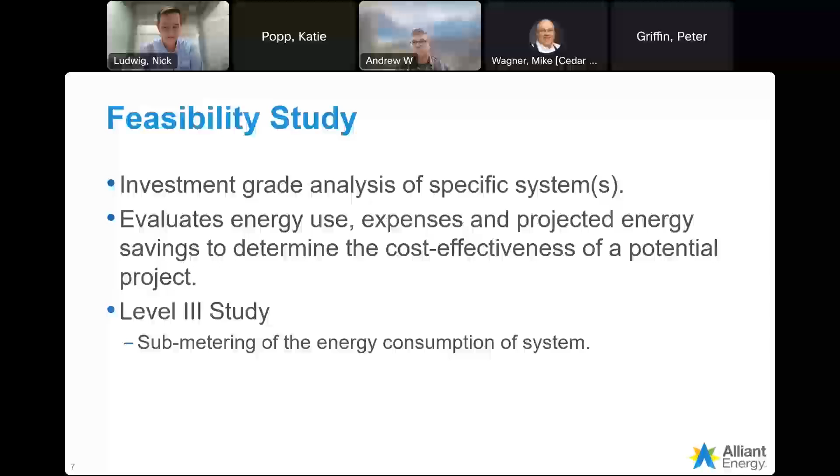So thinking about the process, the first step is to reach out to your key account manager to seek approval. It's very simple - we'll just have a few questions to look at the type of equipment that you're looking at, look at a proposal from the contractor, consultant, or engineer that you're working with. And then, based on that review, you'll have the green light to have your consultant conduct the study.

And here's where the incentives come in. As we're aiming to make this as easy as possible, Alliant Energy's incentive program will cover 50% of the study cost, up to $7,500, upon pre-approval of the study once the study is complete. Then, based on the findings of the report, if you implement 75% or more of the recommendations within 18 months, Alliant Energy will cover the remaining 50% of the study cost, up to $7,500.

And I want to point out, there certainly may be room for additional rebates based on the actual work that's done through a custom rebate. Here we're just discussing the study cost, so you're looking at a total of up to $15,000 to pay for the feasibility study. That hopefully then leads to upgrades, investment in your equipment, which could include custom rebate.

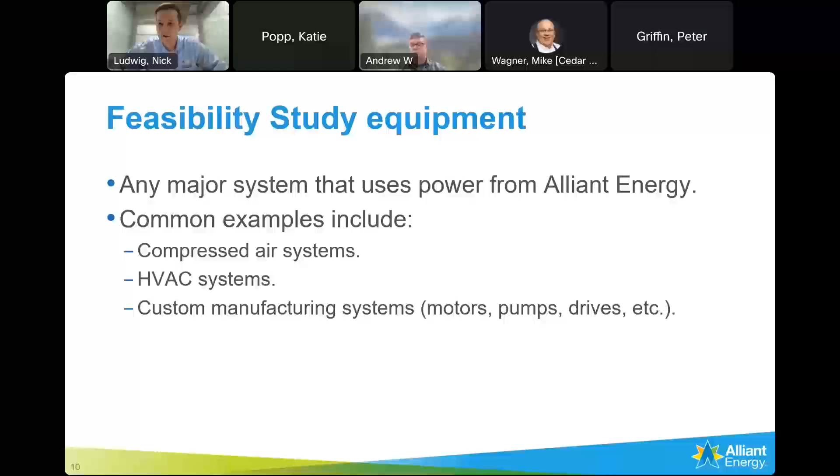As I mentioned, this could be done by the contractor, consultant, or engineer of your choice. We do have general guidelines to help those folks as they do this type of analysis. I'm not going to read through this information, but I just want you to know that we have this available. It could be that we work with the contractor or engineer to help make sure they include the information they need as they work with you to conduct this feasibility study.

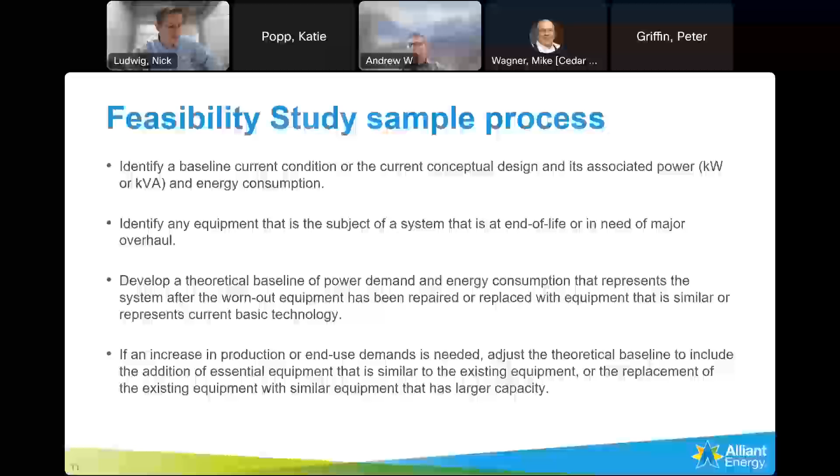But I'll emphasize here at the end in bold, of course, most of our customers are generally interested in the payback associated with whatever type of investment they need to make. If you can calculate the amount of money you're going to be putting into this type of investment, the energy savings associated with that, how many years is this going to take to pay itself off - hopefully then that ties into your sustainability goals and can be a better use of your energy, and everybody wins.

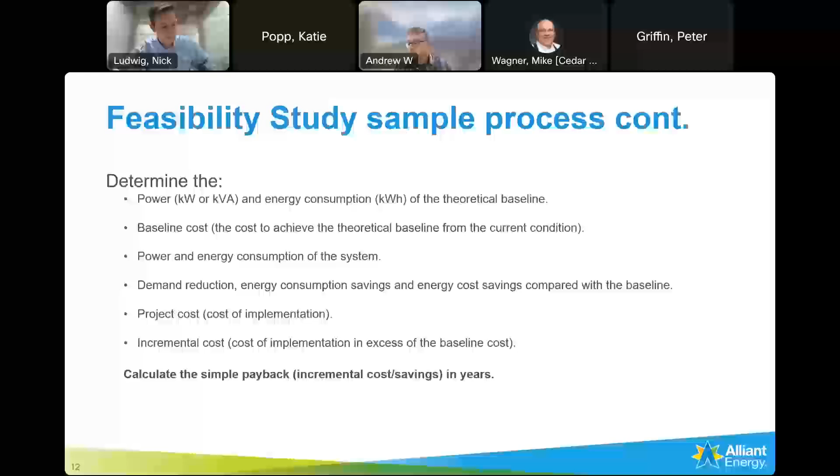I'd like to turn it over now to Peter Griffin, who can discuss an example of one of these feasibility studies that has happened in the past. So thanks, Peter. Thank you, Nick.

To give an example of these in action, we had a manufacturing facility that had 2 chilled water circuits with 3 chillers each that was used to remove heat from their manufacturing process. The customer told us that these chillers were kind of at the end of their useful life. In addition, they used parts and refrigerants that were no longer easily accessible. So they were looking to upgrade these chillers both for their current needs and looking forward into future expansions.

So they reached out to a contractor and they performed a feasibility study. And the results of the study provided the customer with 5 different options of how to go about replacing the systems. Next slide.

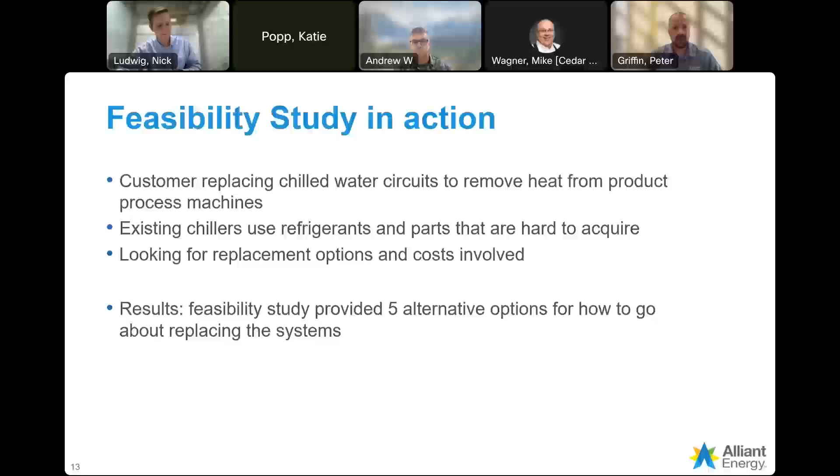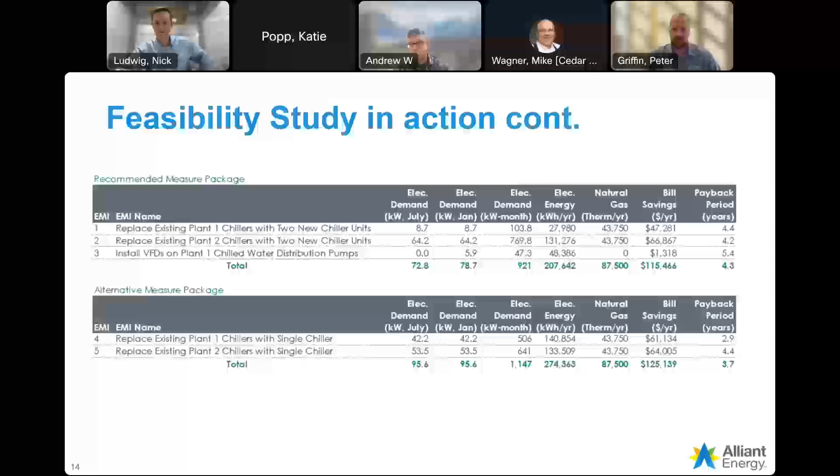So the results of these studies were put into two different measure packages, and these both provided the customer with energy savings of around $115,000 to $125,000 per year, and a simple payback on those energy savings of between 3.7 and 4.3 years. So, looks like a pretty good project for the customer. We were able to identify energy savings and show that it was good for their business. And in addition to that, they were able to plan for future expansions of their manufacturing process.

With that, I will give it to Andrew Wiegand, who's an energy engineering lead with Michaels Energy, to talk about retro commissioning studies.

Yep, thanks, Peter. So retro commissioning, unlike feasibility study, you can use whoever you want to do the study. But retro commissioning is something that we at Michaels help run for the Alliant Energy folks. So the benefits, as shown here, most of them are going to come down to energy savings, energy cost related measures. So we're going to focus on that and improve productivity, improve your system overall. That's a big one. Retro commissioning, by its name, is commissioning back to the beginning, or back to the best you can do while we're on site.

So some of these are on there. Scheduling becomes a big thing, but we'll get into that a little later. Next slide.

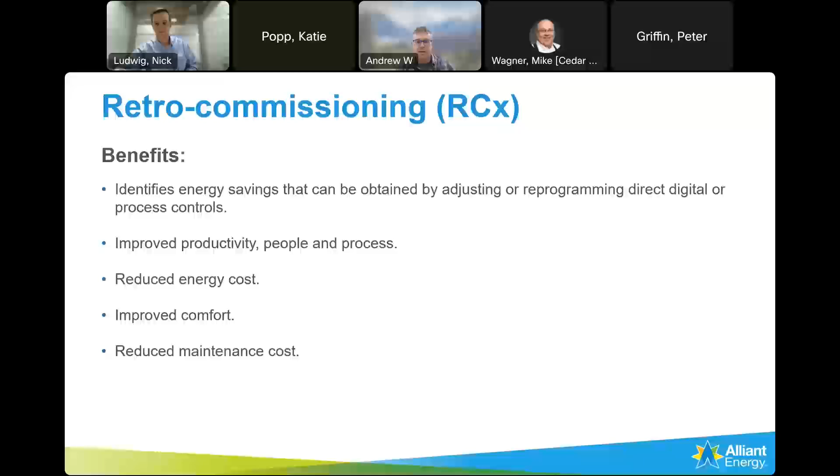So retro commissioning, this is how the reimbursement works for this versus a feasibility study. Feasibility study is capped and has similar paybacks, but for this one we need your involvement to complete it. So you pay up front, and that study gets fully reimbursed by the end of the report. We'd agree on the proposal, you'd pay for the entire study, then 50% gets reimbursed when we deliver the study, and the other 50% when you implement a predetermined package from that study.

As it shows here, the package is going to end up with a 2-year or less payback. One measure may end up being over 2 years, but the whole package together is going to be under 2 years. So you might have one where you replace a valve or something that ends up being 4 years, and because of the savings, that'll still be able to get put into that package.

That doesn't mean there's other things we might find during the retro commissioning study that we can just tell you about and route into other programs Alliant has. Retro commissioning is specifically for quick payback measures, because the ones with longer payback and more capital cost, Alliant has other programs for, like custom rebates or midstream programs.

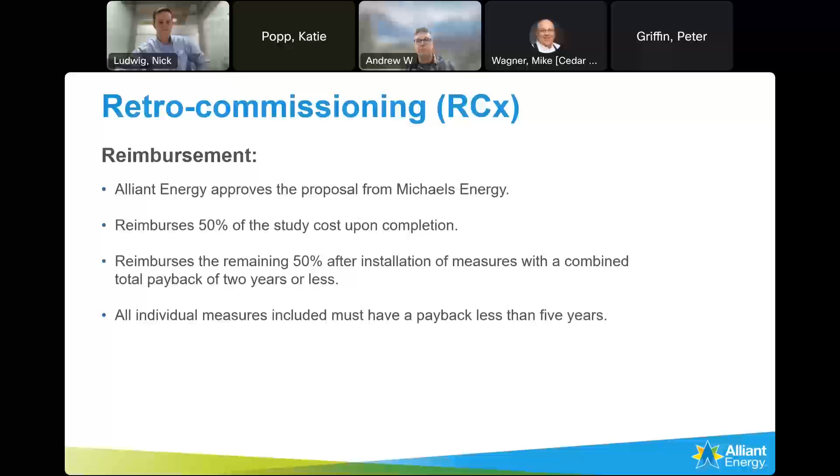But what we're after is adjustments, and most of those adjustments are able to be done on the DDC controls. So typically it's a better fit for buildings with large central systems, chiller boiler plant systems, like hospitals and big plants, or maybe colleges, where they have a DDC system and may be low on staff to keep ahead of all these different changes.

There's energy analytics, something you may have access to. If you don't, you can ask your account manager. It's a program Alliant runs that might show you if your demand is high for a very short period of time. That might be something we can look into as part of RCX. It just shows that you're getting charged for a very small period of time when you can likely do things to reduce that.

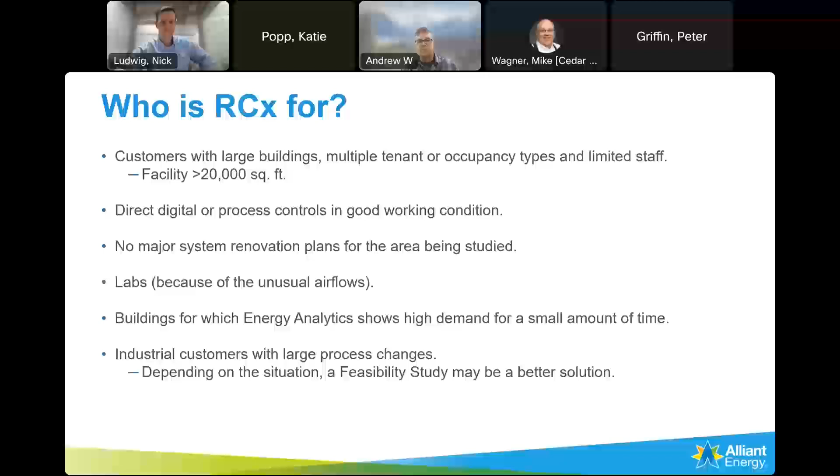We do work with your controls contractor to implement this. Sometimes it's stuff that's locked out for us anyway that we would need them to do. We do the study, and we tell your controls contractor we need to do X, Y, and Z, and they need to purchase a sensor for whatever. So, next slide.

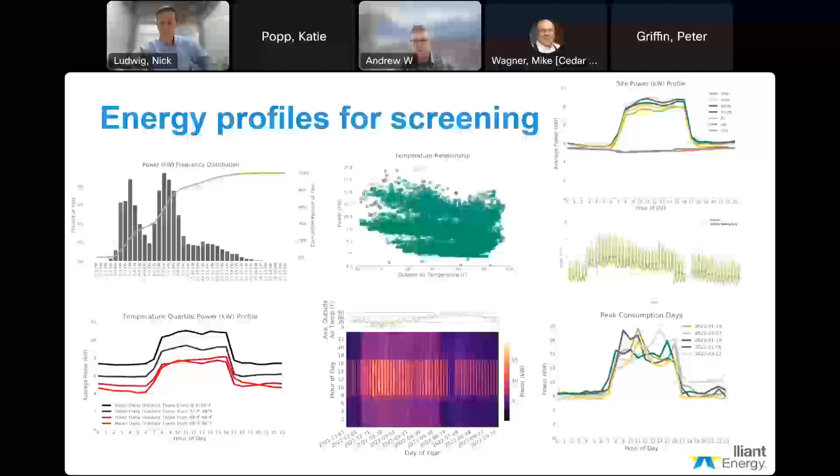Valve positions - sometimes valves fail. That could be something we find. A failed heating valve causes extra cooling to get used, because it shouldn't be running but it's leaked by. Sometimes that'll end up as an RCX measure depending on the valve.

Sometimes it's capital improvements that you'll end up with either a feasibility study or custom rebate, or maybe another program - or maybe it won't qualify. We can look into that, or at least let you know if we do find it. But any one air handling unit or chiller is going to have a bajillion different sensors. Any one air handling unit's got at least 4 or 5 temperature sensors and 3 dampers and a motor, maybe 2, and all of those have multiple wirings - eventually something's going to go out of calibration.

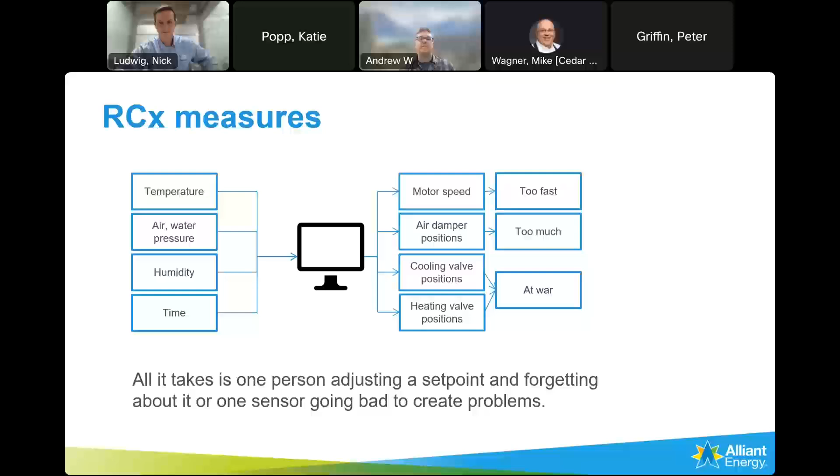How old is your equipment? We don't want to go and do a bunch of controls changes on your DDC equipment knowing it's from 1995 and runs Windows 2, and you're going to have to replace it. You don't want to spend that kind of money if you're going to have to upgrade that in the very near future. So some of those vetting things get asked, and that's usually a very short window - from the ask to the call is probably a week or two. So we can do some of it.

Then proposal is where we do all those fancy charts and graphs so we can come up with what we think will be the savings you'll acquire. Given other similar buildings and what you've got and some other stuff, we think it'll cost you this much for the study. It all gets reimbursed, but upfront it'll cost you this much. And we think we'll have this much savings because of these factors. Then you would sign off on the study.

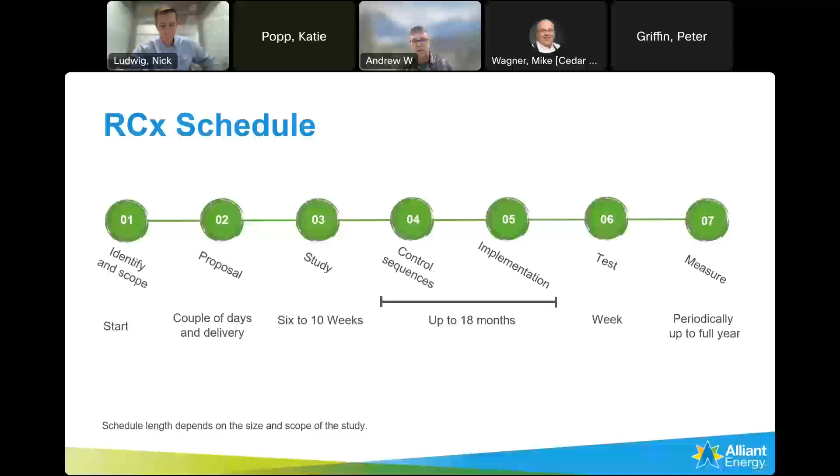Next slide, and then I'm going to pass it back to Peter for this example.

We also found room for improving the economizer settings for their chillers and rooftop units to take advantage of free cooling. Finally, we recommended that the time and temperature setbacks for the offices be adjusted to match occupancy, since the manufacturing facility was running more hours than the office, but the offices were on that same schedule.

So with that, I'll pass it back to Mike Wagner, who will handle any Q&A we've got.

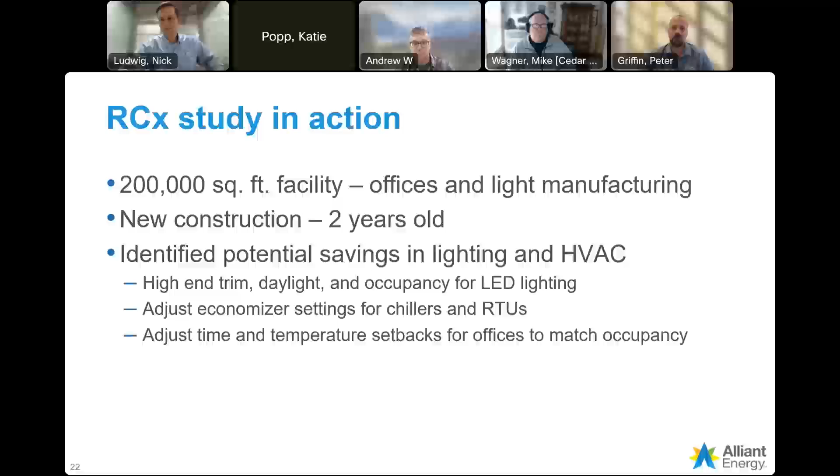This just reminds me of moving into my house, and the thermostat was set based on the previous homeowner's schedule. We had to do everything we could to reprogram it. I think that's kind of a lot of it, where you get going and then all of a sudden it's like, wait a minute, what are we doing with this site?

Andrew, when we were talking about retro commissioning, I think this is a good way to look at how we work on doing some kind of reset on a piece of equipment, but also try to make that equipment more energy efficient, even though there's a whole lot of other equipment that interacts with it or works together. It's kind of like being able to hit Control Alt Delete, but not being able to mess with everything else at the same time.

Yeah, as part of this, we were going to come on site and meter things. Because we don't want to come on site for an hour and make assumptions as to operations during the night or the middle of the night, or occupancy. So we meter and we figure out temperatures, and we use typical strategies that are publicly available, and we use those as guidance.

It doesn't normally, or on average it may go with that, but it'll have some adjustments, like, oh, we don't want to go down that far. But we use those as guides, and we use the meter data to show, like, this would be the time when you'd switch temperatures and reset temperatures, change scheduling, or change damper positions. So we use that along with some guidance and knowledge that people at Michaels have just from doing a bunch of these.